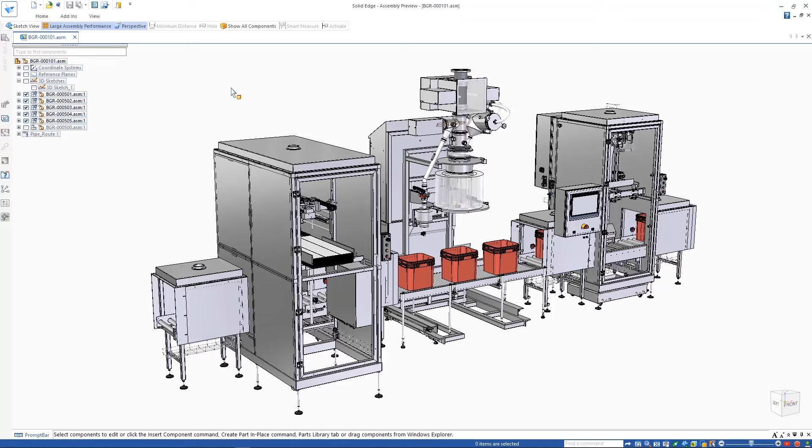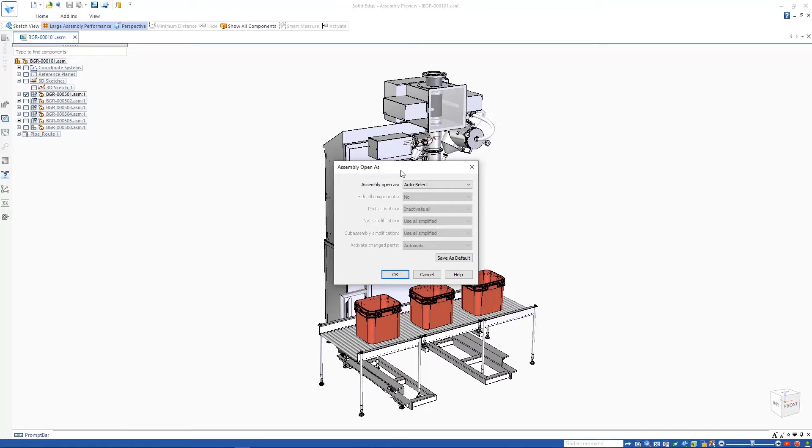Assembly Preview Open allows users to reduce the amount of data loaded, allowing assemblies of any size to be opened in seconds for the quick review of a design. Users can manipulate the view, change view styles, hide and show parts, or change display configurations. Here, we'll reduce the scope of what needs to load by showing just the main unit of this dosing machine before loading the assembly into edit mode.

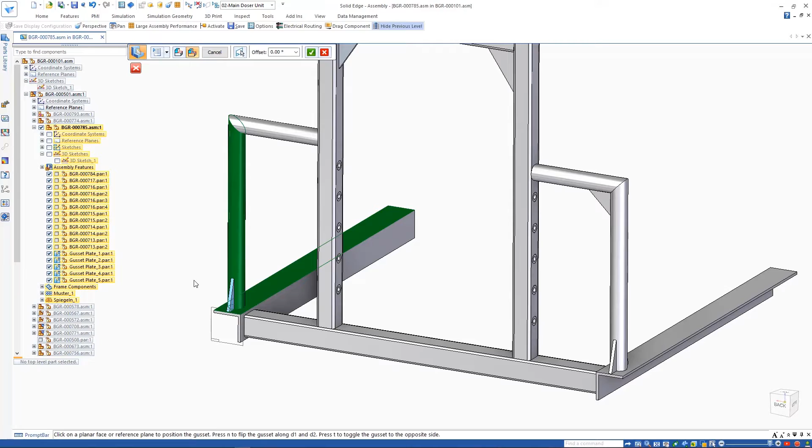Another time saver is the ability to rapidly add strengthening gussets, typically used in structural frames. A gusset may be placed simply by selecting the adjacent faces of appropriate parts. They can also be applied to cylindrical faces. Users have full control over the placement position, including angle, and gussets are included in the bill of material for the assembly.

Continuing with the internal components theme introduced in the last release, Solid Edge now provides the ability to create new internal components using assembly modeling capabilities. Here we have a pneumatic cylinder assembly which has been imported as an internal component structure. An additional bracket is required, but as it's part of a purchased assembly, we'll model it as an internal component. Defining it as a sheet metal part, we can also give it a name and material.

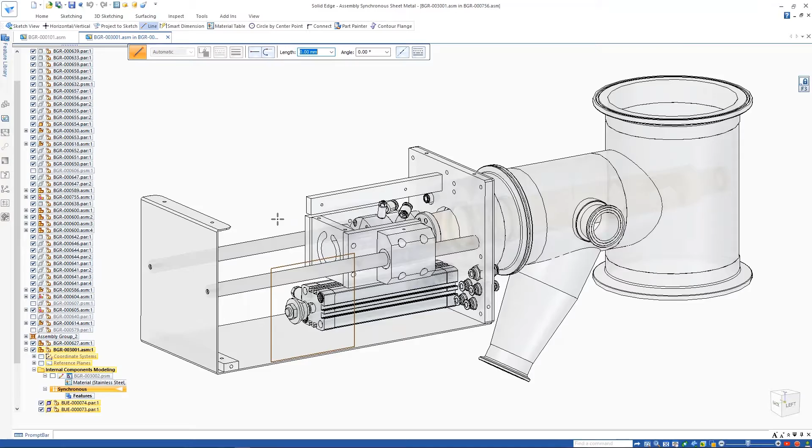Looking at the home ribbon, we can see that we have a full range of sketching and modeling tools at our disposal in the assembly modeling environment. As we sketch the profile for each sheet metal bracket, a new context toolbar provides the most logical functions based on the type of object selected. This makes quick work of applying relationships and dimensions on the geometry.

Dragging the sketch creates a contour flange where the length and thickness can then be defined, followed by some corner breaks.

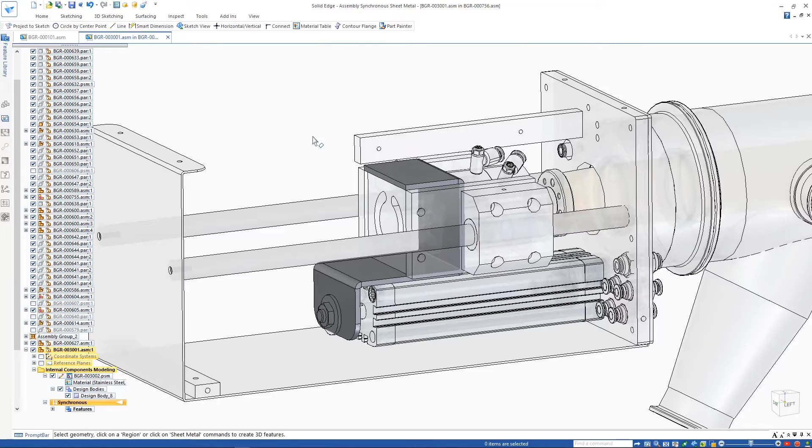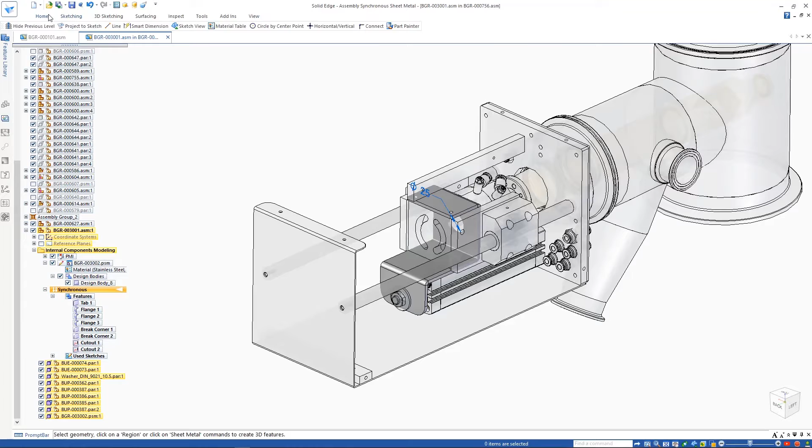Some additional holes will help assemble the bracket. This can be easily generated by referencing geometry from the surrounding physical and internal components. The Pathfinder provides access to the material to be amended, along with the gauge properties for the part if necessary. The list of features that have been modeled can also be seen.

Once the internal component is complete, the Relationship Assistant makes light work of creating the correct assembly constraints, and the operation of the dosing system can then be simulated even though the cylinder consists entirely of internal components.

The new Component Finder speeds the process of locating parts. Simply enter the first letters of the name and the selective list displays the valid matches.

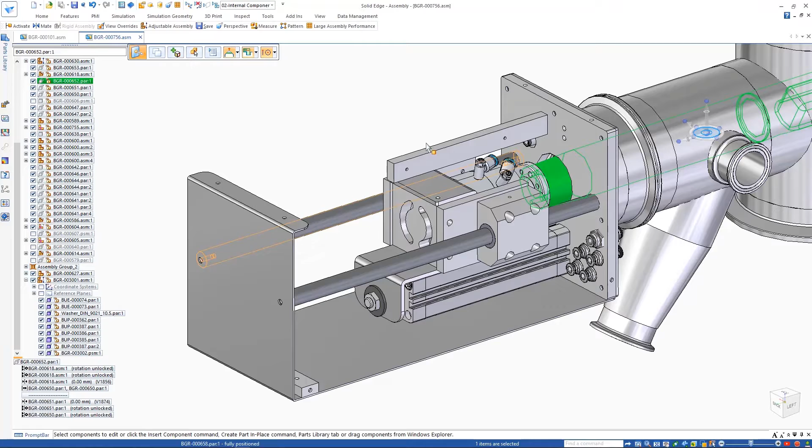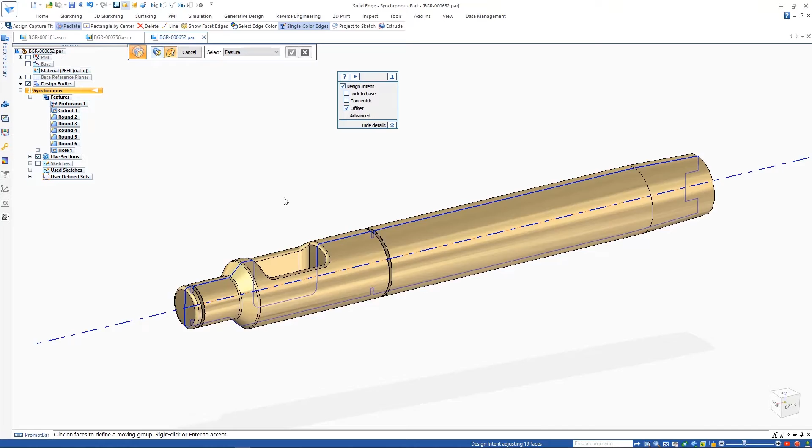A new synchronous radiate capability dramatically speeds the ability to edit cylindrical geometry. Simply select the faces that need changing by using shortcuts to speed the process. As the geometry is changed, design intent rules can be used to control the result. The depth of the pocket shown here needs to remain fixed, so the Lock to Base option provides the flexibility to control this by retaining the original geometry.

A new Assign Capture Fit command allows relationships to be predefined in common parts, which allows them to be automatically assembled. Here we can see the relationship group of this handle component. Adding an additional planar align will complete this group definition. Placing the handle into our assembly and then selecting both target components automatically assembles them.

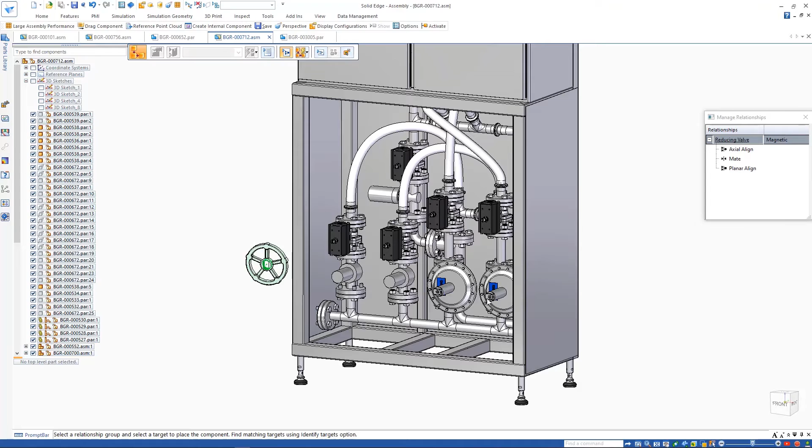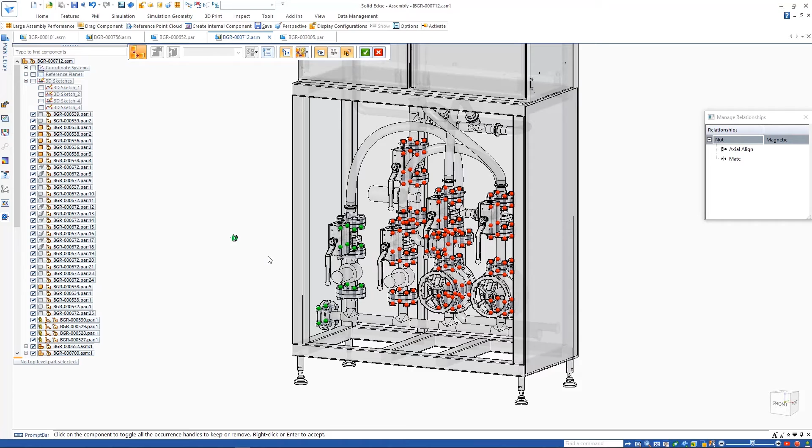Placing another handle, the Identify Targets option visualizes the matching components. Confirming the action assembles them at all 5 locations. For this fastener, there are a lot of matching locations, many of which are not required. The Toggle Component option allows a quick fence select to rapidly place the remaining 16 instances.

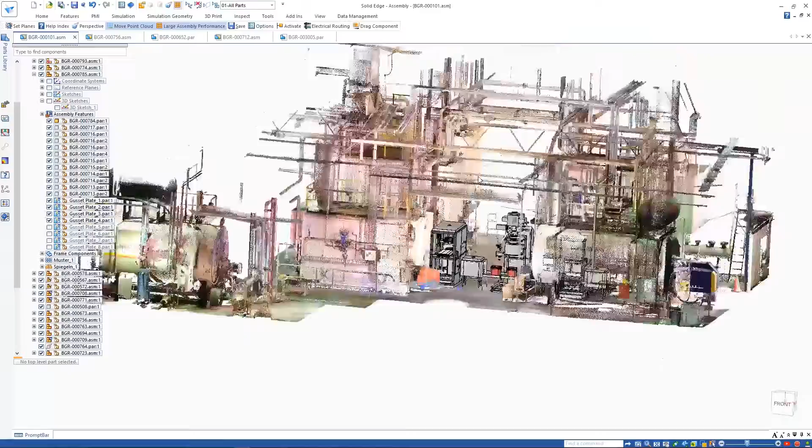Solid Edge introduces the ability to reference point cloud scans in order to visualize a design in its intended environment. The command supports all common formats. Full control over point density and size is available. The point cloud can easily be repositioned in relation to the Solid Edge model, and clipping planes can be used to focus on a required area of the design.

Displaying the tank and piping that feed the dosing unit, we can see that its position isn't ideal and needs relocating. A quick positional edit will fix this. Measurements can even be made between the model and scan geometry to ensure correct clearances.

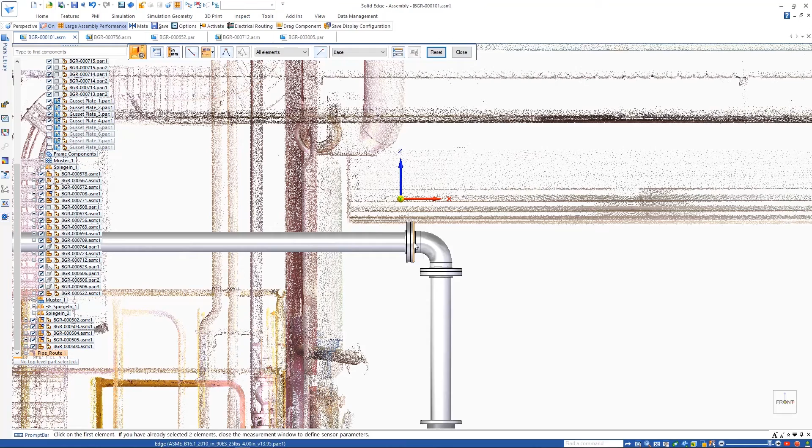Working in partnership with our customers, we've added more than 500 enhancements to our latest release. These are just a few. Solid Edge, engineered to grow your business by delivering enhanced core functionality, productivity, and performance to enable the digital twin.